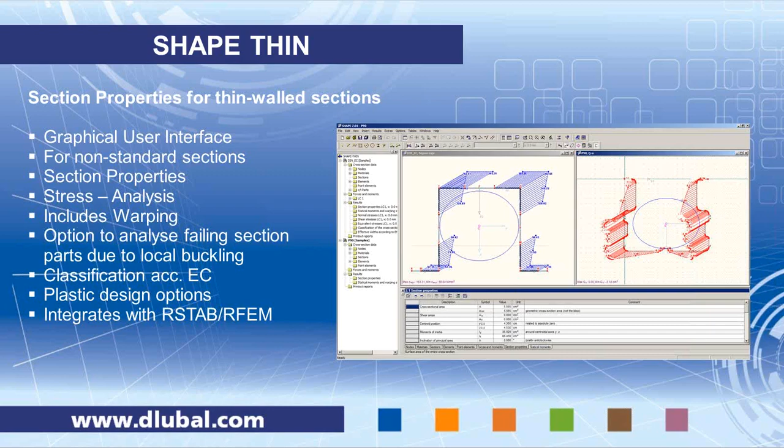It's also capable of importing internal forces from RSTAB, RFEM, or you can manually enter internal forces as you like. We will see this module live, presented by Chelsea in a few minutes.

The second module that we are going to take a look at is RF-FE-Ltb. It is meant to do buckling and lateral torsional buckling analysis according to second order theory.

It's made from a 7-degree-of-freedom 1D finite element, which includes warping moments.

In general, you find in the codes procedures for how to check stability for standard sections, like an I-section, but once it comes to a general section, there aren't many regulations you can use.

In general, you have to use a program like RF-FE-Ltb, where you can also set loads eccentrically.

That includes the 7th degree of freedom, the warping degree of freedom, and with an imperfection and second-order theory analysis and a stress analysis at the end, you can check for the allowable or limiting stress.

And you can check if the critical load factor is smaller or larger than 1. As I said, it works for all kinds of sections. It allows you to place loads eccentrically.

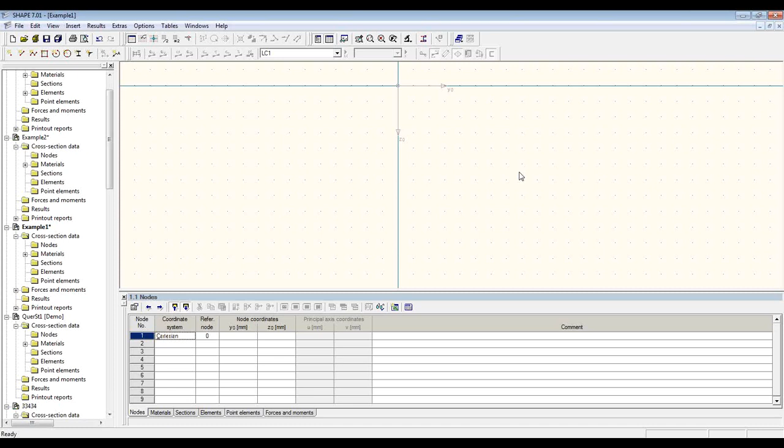Below that are tables. To the left here we have a navigator, and at the top there is a toolbar with several tools for modeling and also for displaying the results. So in Shape-Thin, when you are creating a new file, you have some options here in this dialog box.

First, you define the name of the section, which is also the file name, and you can also add a description, which will appear in the heading of the printout report. Below here, you can see some options for calculation.

Here you can define if you would like plastic section properties to be determined. You can also perform plastic design, check limiting ratios according to DIN, and also check or analyze the effective cross-sections. To the right here is just an option where you can define the direction of the global coordinate axis.

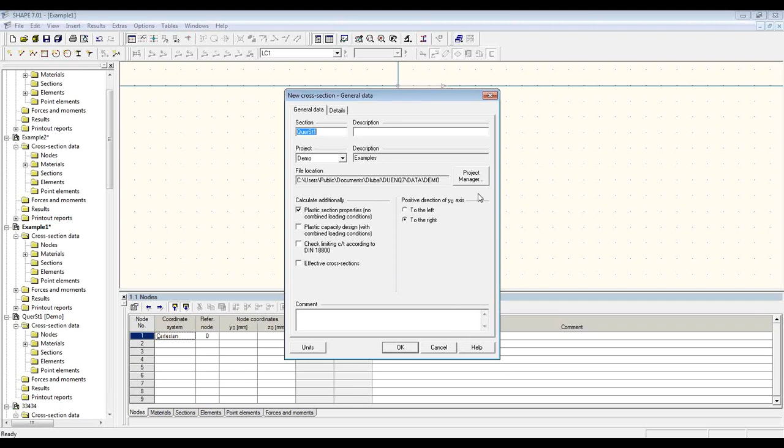Okay, one last thing before I start with my example, I'd like to take a quick look at the project manager. This comes with Shape-Thin and is a nice way for you to be able to quickly access and organize all of your files in previous sections that you've created. Here is a preview of my first example I will be creating, and here's a preview of the second one, so you can keep that in mind.

Okay, so getting started here, my first example will be demonstrating one of the ways in which you can create sections in this program, and I'll be making a built-up column section out of standard I sections and then modifying them. I will be creating an opening and modeling some welds.

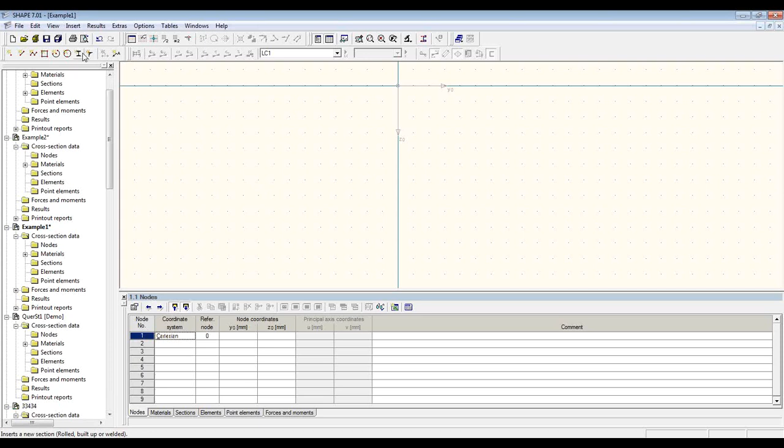So first, I'll go ahead from the toolbar, open up the cross-section library, and here I can choose my I section for my first part of this. So I'm going to take an IPE 500.

And this dialog box that appears is what facilitates you placing the section. So since this is my first one, I can just go ahead and place it so that the top flange is at the center coordinate.

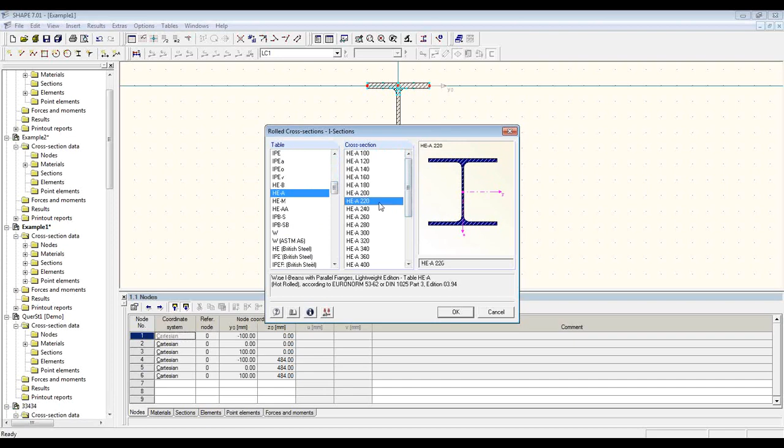Okay, going back into my cross-section library, I can choose an HEA 220. And here I'll use this dialog box a little bit more. I want to define a rotation, as if you saw from the preview, I'll have a rotated I section attached to the web. And here is where I define which part of the section I'm deciding my placement by.

So at the moment I have the center one selected, so if I go to the window and pick this node here, the center will be placed there. So first I want to go in and choose the one on the left side, and then, one moment.

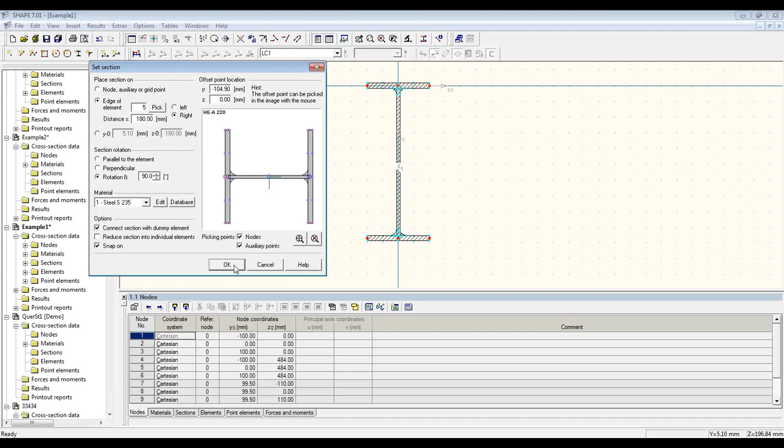Okay. I can go ahead and choose where it's going to be placed on the section that has already been placed. So here I pick the element that I want on the edge on the right side, and so there you can see it's locked on the right side of the web here. And I can just place it anywhere, or I can select my distance from here. Okay, and hit OK, and there I have it placed.

So now I have two standard sections that can be selected independently. If I would like to show the section details, I can go ahead and display them from this dialog box if you need to reference that at any point.

Okay, so as I said, I'd like to make some modifications, add an opening. In order to do that, I need to be able to select these parts individually. So if I make the selection of the entire element, right-click, and select Reduce Section into Elements. So now I'll show you exactly, letting me know I have 5 elements and 4 point elements.

So here I'll go in, zoom in. You can see that each side of the flanges and the web each make their own element now independently, and the curved parts are point elements as well.

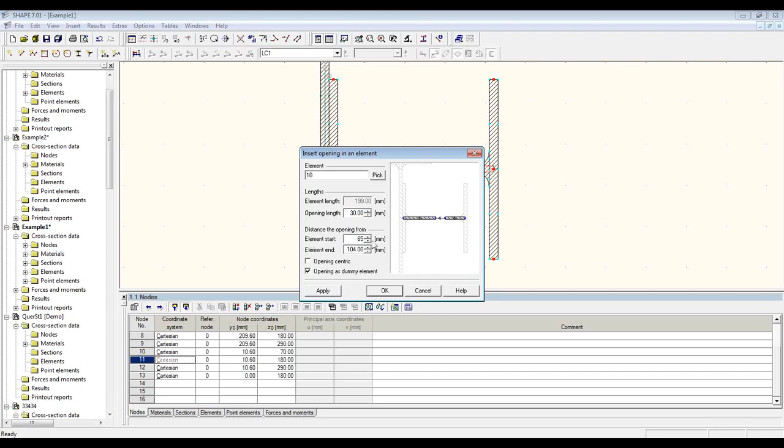So now I can select the web, right-click, and choose to insert an opening. So here, define my width of the opening. I want 30 millimeters, and its location. I want it to be 65 millimeters from the start of the element, which in this case is the right side. So apply, and I have an opening placed.

When an opening is defined, what is put in between is a rigid dummy element. And for our calculation, we have a value called the effective thickness, which is for the shear transfer. The recommended assumed thickness is the average of the thicknesses of the neighboring elements. So in this case, the web here is 7 millimeters, so I'll make the effective thickness 7 millimeters.

Okay, so next I want to model a couple welds at this connection point at the top and bottom. So for that, I'll go back up to the toolbar and select a new point element. And this is ready to go.

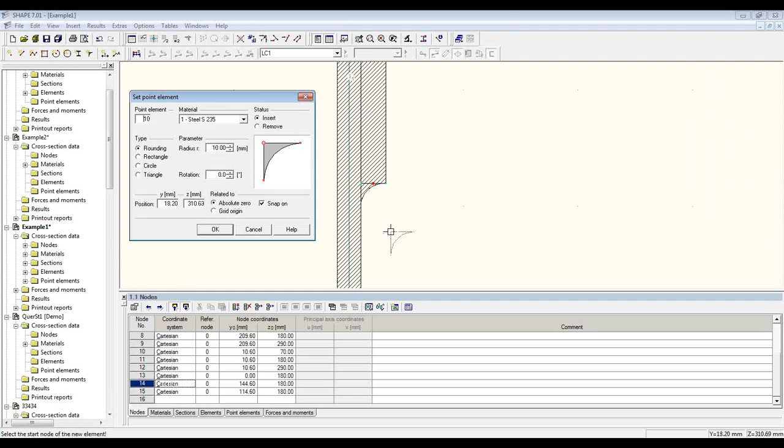I have my radius at 10 millimeters, and then I can select which node I want to place it at, and there I have my weld. If I go up to the top, I can make a rotation of negative 90 degrees and place the top weld there. So now the area of this weld element will be included in the total cross-sectional area.

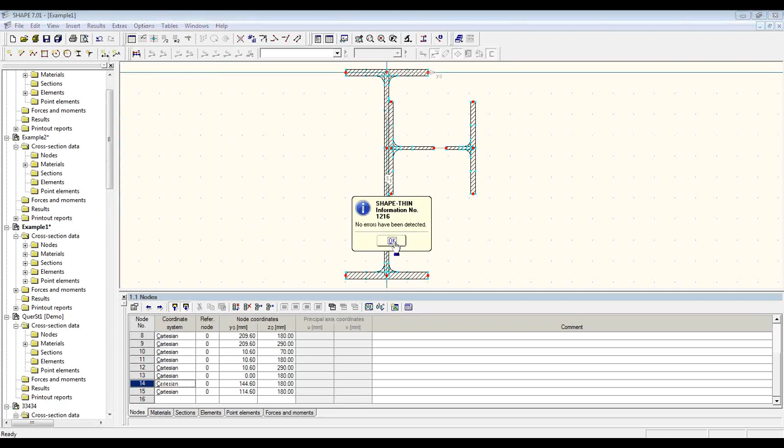Okay, so at this point I have all of my section modeled. What I can do before my calculation is a quick plausibility check. This check will find if there are any errors, and if there are, it will tell you exactly what the problem is so you know what to fix. So, plausibility check, no errors were detected. Now we're ready to run our calculation and get our results.

So the first table you see here is the section properties. Here's a list of all the significant section properties that have been determined. You have your shear areas, cross-sectional area, position of the centroid, and so on. You can define what is included in this list by using a filter here, and you can include even more properties as well.

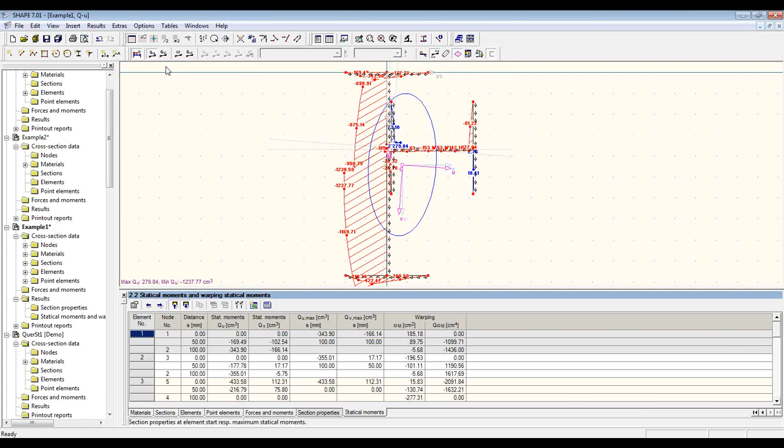Next, the table available is the statical moments. This is the numerical results, and these results are also included in your graphical layout. So I'm going to turn this back on, and you can see the statical moments in both directions, your normalized warping ordinates, and also your statical warping moment.

One thing I'd also like to point out in the tables here, before you get to your results, is a table for internal forces and moments, in case you want to perform a stress analysis. These values can be imported directly from RSTAB or RFEM, or they can be manually placed.

I'll go ahead and add a couple load cases just so you can see, at an x location of 0 - you can do it at multiple x locations. I'll add a compression force of 80 kilonewtons, and then bending moments in both directions for the first load case. Then for my second load case, I will add a smaller axial force, and bending in the opposite direction for my last bending moment.

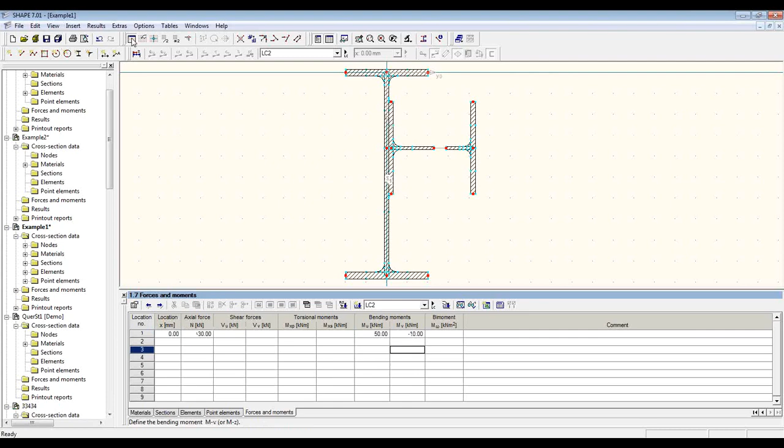Okay, so now when I run my calculation, a few more tables appear here at the bottom, and you see the values both in tabular form and graphical distributions. So I have my normal stresses, my shear stresses - there are none here since I didn't have any shear forces - and also your equivalent stresses.

So going back to my graphic here, I can include these images of the results in my printout report if I'd like. I'll go ahead and send a picture of the equivalent stresses to the printout report, and set it at 50% of the page. Then I'll also send the normal stresses, also at 50% of the page, and open it with OK.

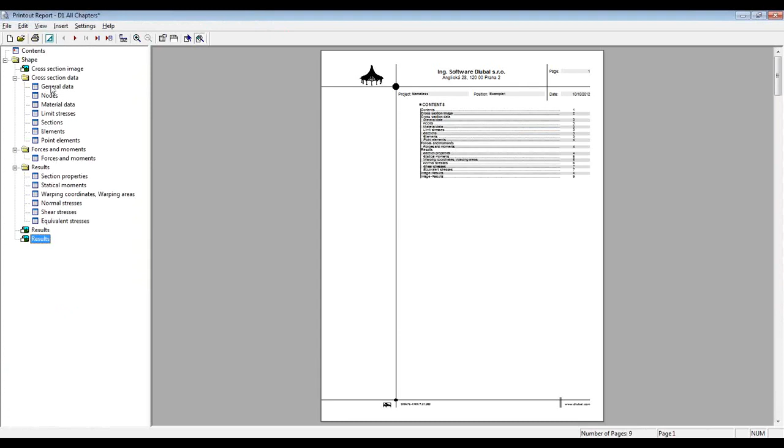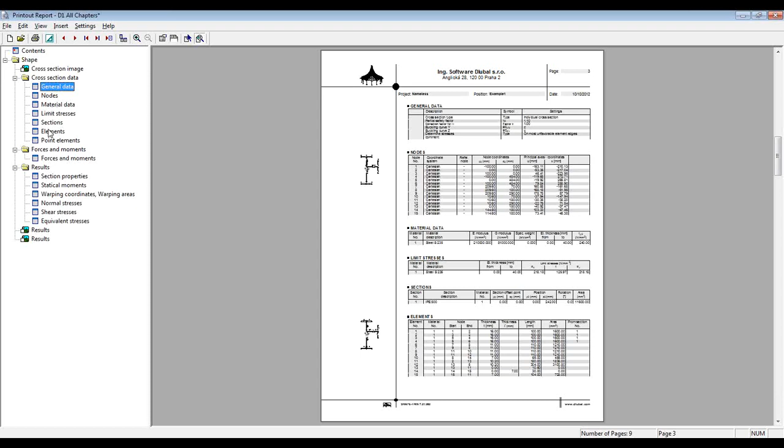And here we have our printout report, which comes with the default setting. It has an image first, and then your tables of input data and also your results, in the same order as they appear in the program. Below you can see the images that were included. You can customize exactly what information you want to include in this dialog box, and reduce the amount of information that's included.

Another nice feature of SHAPE-THIN is that for a quick summary of the section, input data, and section properties, there's an option to create a so-called short form printout. This is usually one page and sent directly to the printer, but just to let you see what it is, I'll go ahead and append it to my document.

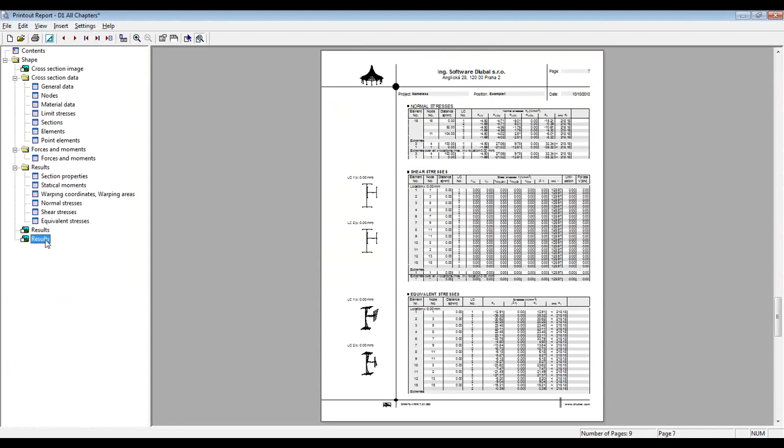So this is the page here - just a one-page sheet with an image of whatever you have displayed at the time you send the print, and a table with your input data and then your section properties that have been calculated. So that's nice to have.

Okay, so that's all for my first example. I'll go ahead and get started on my second example. If you remember from the quick preview I showed at the beginning, it's a symmetric section that will be used in a rain gutter system.

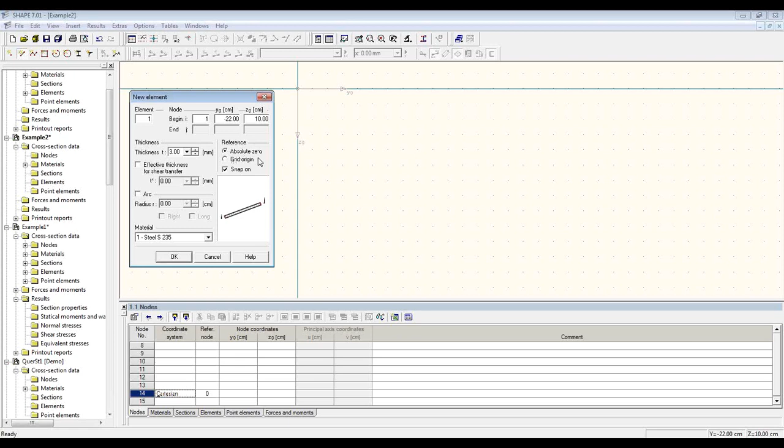And so for this, I will just draw it in manually using the element tools in the toolbar. To get started, here you define your grid, or your reference point in the grid. I'm working with a 2 centimeter grid spacing. Also define your thickness and material, and then you can just draw it into the grid.

My second line here I want to be 5 centimeters, but because it's in between my grid spacing, it's easier for me to just type in 5 centimeters as the end node. So it appears, and I want to continue on from this node, but again it's between the grid spacing, so what will help me is if I adjust my grid origin to be at this node. Now I can continue directly from here.

I want the height to be 16 centimeters, and then the width of the trough I want to be 30. Because I have my reference, you can see in the dialog box my reference is at absolute 0. If I change it to the grid origin, so now this is the 0 line for Y, I can go ahead and place it at 30.

Since it's symmetric, I can just do manually half and then make a copy of the rest over. First I'd like to shorten this line from 4 centimeters to 3. A quick way to do that is to go into the table, find that line, and adjust the coordinate that way. Now it's shortened, and I'm ready to select and make a copy.

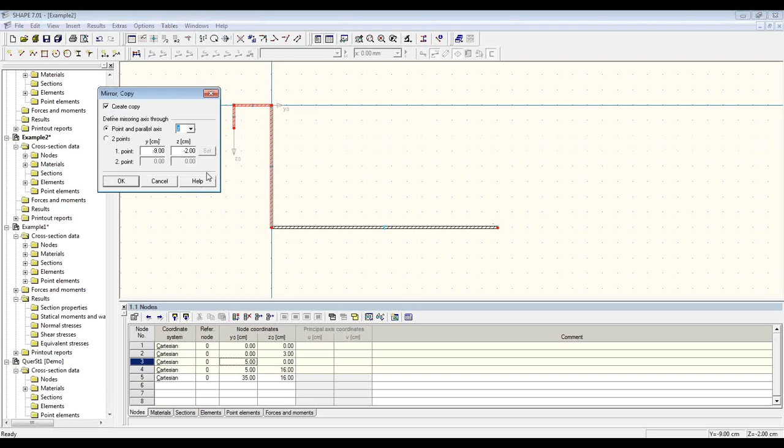Going to the toolbar, I have the mirror option. Create a copy through the Z axis, and select the center of this trough line that I have here. So just like that, I have my full section.

And I can go ahead and run the calculation. First I'll just do a plausibility check to make sure I have all of my elements connecting. Everything is okay, and I can get my results.

Again, you see right away a table with the section properties, and your statical moments and warping constants there. Another thing that is nice to include in your documentation is dimensions, an image of the dimensioned section. I'll show you how you can do that quickly.

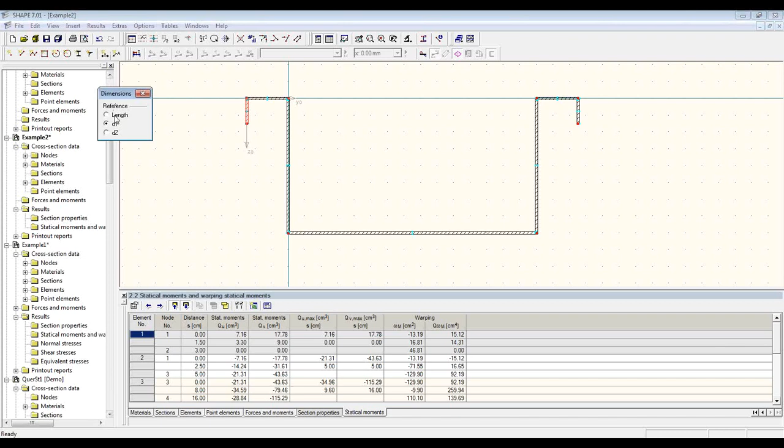I can turn off the view of my results and use the dimensioning tool here. Very quickly I can just select to show the heights of these lines and also do the horizontal lines. This is also a nice way to quickly make sure you've made all your lines the right length.

And here you can see, if you check the table, I believe I made... everything is okay, so I think I just made a bad selection with my— I can't select this, but here we go. I just made a bad selection for the dimensions, so let me just try that again.

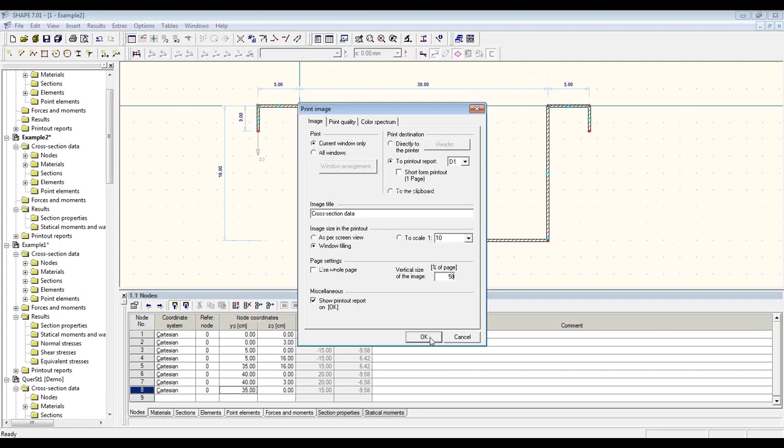Yes, everything is okay. As I said, this can be included in your documentation, so I can just send this once again to the report. 50% is a good size for this type of image. And then there I have a dimensioned drawing of my section to include in the documentation.

Okay, so this is all that I had to show you regarding a couple different ways in which you can model in Shape-Thin. It's also possible to import a Dxf file to use as a template, so this is what Walter will cover, so I will save that for him.

Walter will also take you through a few more hints with working in Shape-Thin and continue with the section on into RFEM and also present the module FE-LTB. So thank you very much for your attention, and I'll go ahead and let Walter continue from here.

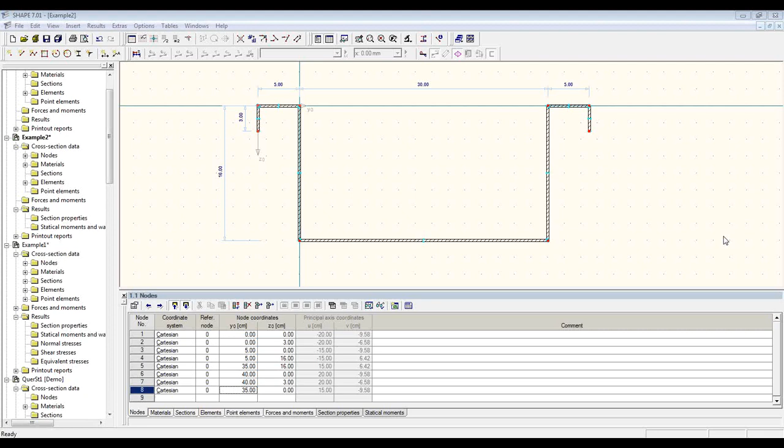What I'm going to do next is I'm going to import into a new Shape-Thin model a Dxf template. Therefore, I open a new cross-section. I name it with a number in this case, and I stick with the default template. And I have here an empty file.

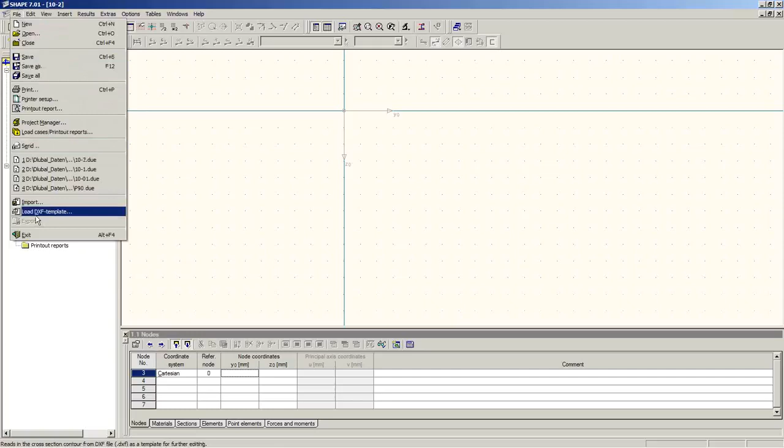The Dxf template can be from any Dxf file. You find those files typically from the makers of such sections on the internet. You can download CAD templates, and I used one of those from a cold-formed purlin maker and saved it as a Dxf file.

Once I import it, I get a small preview dialog. I can first of all show and hide the different layers.

In those DXF files, typically there are all kinds of lines, texts, and explanations, and you have the option to select a certain layer where the information you like is located. I can also automatically assign a thickness to this layer or to those elements.

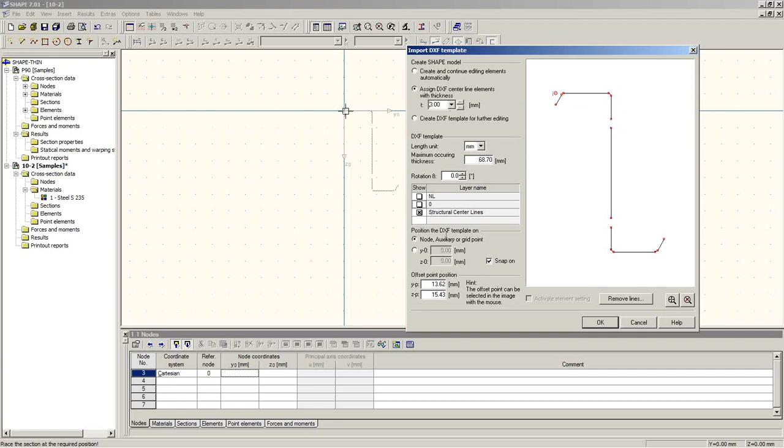I enter the thickness here in the text box, 3 millimeters. After that, I can grab the template at the center point origin and then drag and drop it into the main Shape-Thin window. At a mouse click, I have my complete structure already generated.

What I see here also are so-called arc elements. If I double click on one, I see the radius of those elements, the thickness, and so on. It's just like a straight element, as Chelsea showed us, but there are also arc elements possible.

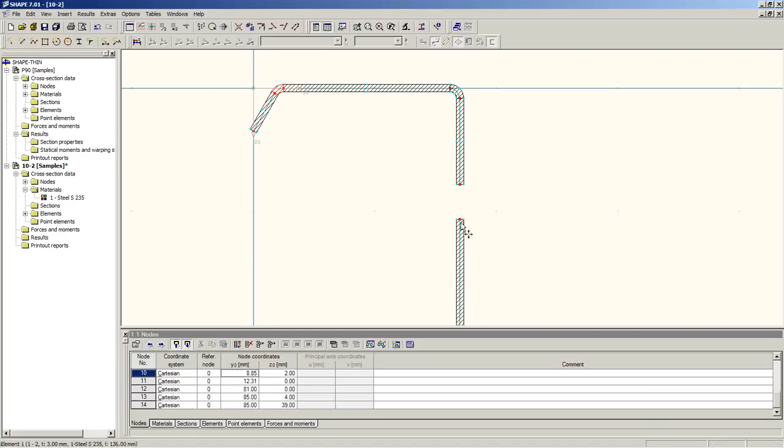Here in this model I had there was an opening for bolts. Because I'm going to use this cross-section to model a three-dimensional 1D beam, I don't want to have this opening along my beam, so I close it here, because bolt holes are typically only a local problem.

So I can just click and drag the nodes to the next connecting node and it will automatically connect. My cross-section is then ready for analysis. I run the analysis and get the tabular information of the results, as Chelsea showed.

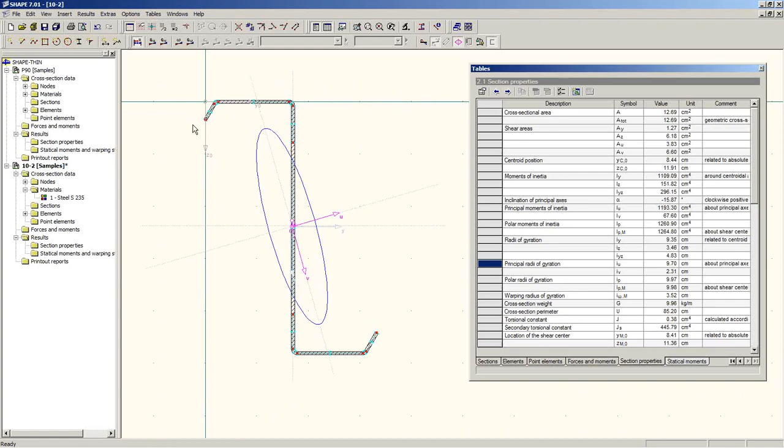Interesting for me are the section properties, and I can display them, for example, on the side of the window, and I can go through the graphical results by showing the different results here.

I notice here there is a little problem where I can close the tables - I don't like to see them here - where the flow of the diagram is not continuous. The sign of the result may depend on the orientation of the individual elements.

If that's the case, I can click on the element, right click, and use the command reverse direction. I do the same thing here because we had the same problem - reverse direction. If I analyze the structure again, now I see there's a continuous flow of the results and it forms a nice picture.

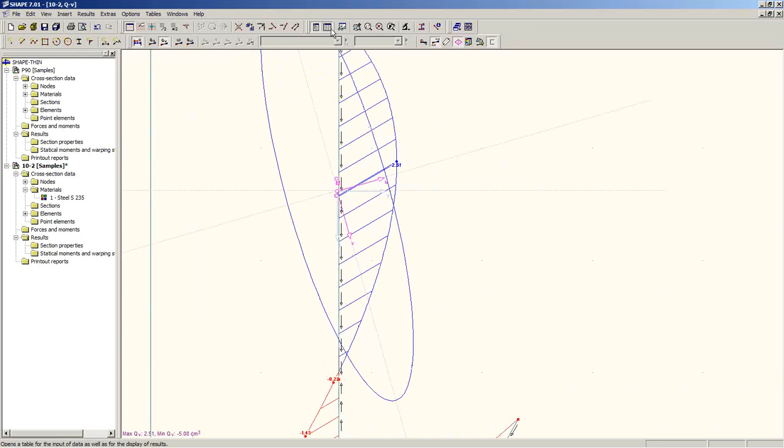With this I also get, for example, the rotation of the principal axis. If I want to know how big that angle is, I can show the table, and there should be the inclination of the principal axis: minus 15.87 degrees.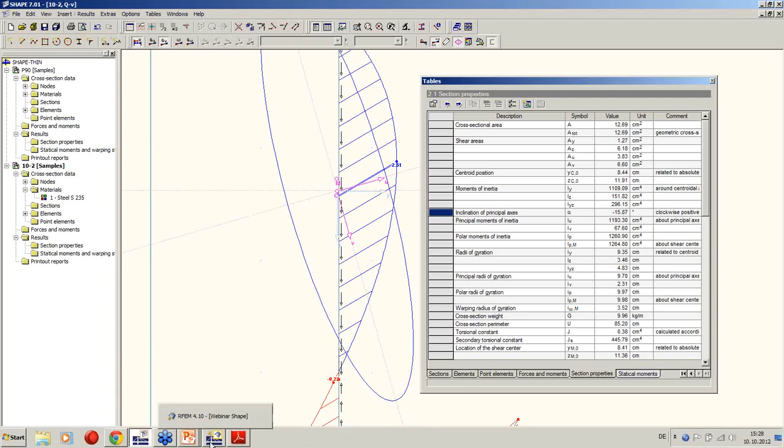I save the result in file 10-2 and go to RFEM. In RFEM I will also create a new structure. What you see here is the final result of what I'm going to do now.

It will be a 5-meter long beam with a linear load on top, and we will do an analysis of the critical load and show some tools you have inside RF-FE-LTB. We start a new structure inside RFEM, and I can call it sample 2 maybe. It's a 3D structure.

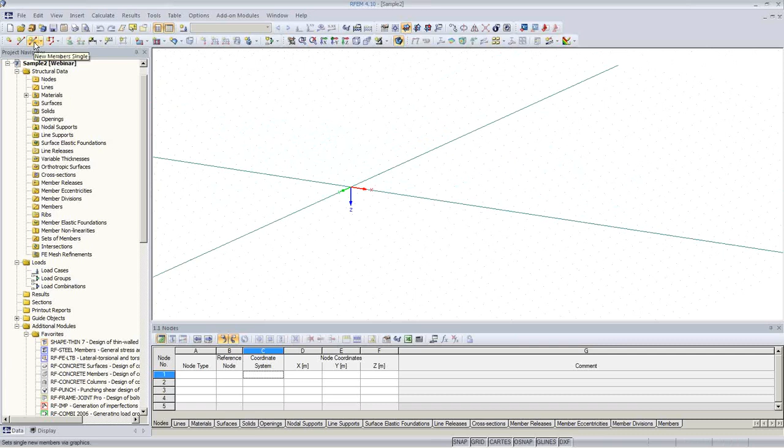I can model it just as a regular structure that you might have seen in the previous webinars. I create a new member of type beam, and I create a new cross-section and choose it from the library.

In the library, if I go back one time and choose the library here, I see there are two buttons: cross-section programs, Shape-Thin, and another one we have, Shape-Massive, which is for thick-walled cross-sections. I use Shape-Thin here, and then I have the option to select my cross-section that I just made.

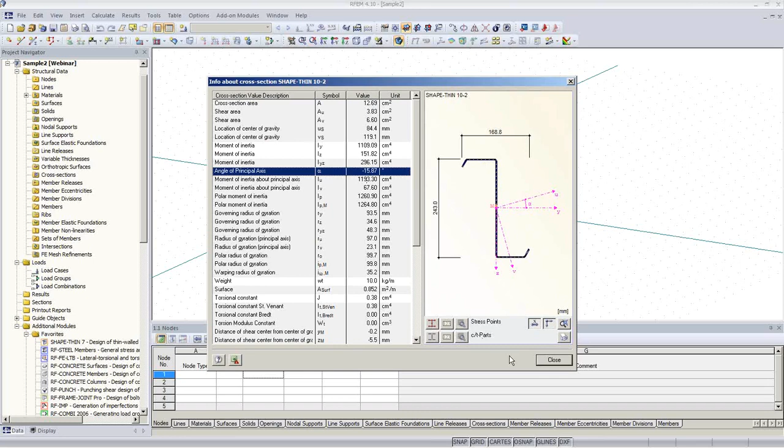It's 10-2. I can check also the sectional properties, and all the parts are here. It's like a regular integrated RFEM section. Also the angle is there, so most likely I picked the right one. Okay, material is steel.

A couple more OKs, and then I can enter and select the grid lines and enter the member. It's now 5 meters. You see here a nice feature: the rendering is just like a standard library section, and it gives a very good visual impression.

If I don't want to see it because it's hiding too many other parts of the structure, I can turn the rendered mode on and off.

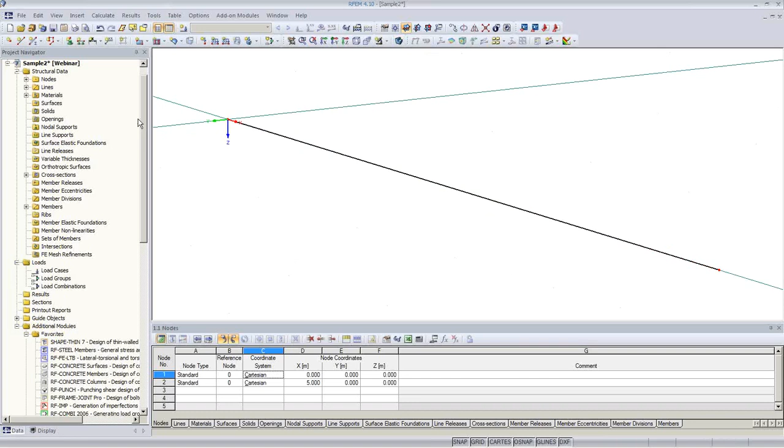I need some supports. I create a new nodal support and choose a support that is fixed in all 3 directions, and the restraint about the local longitudinal axis phi x. So, OK, I can enter the first node support.

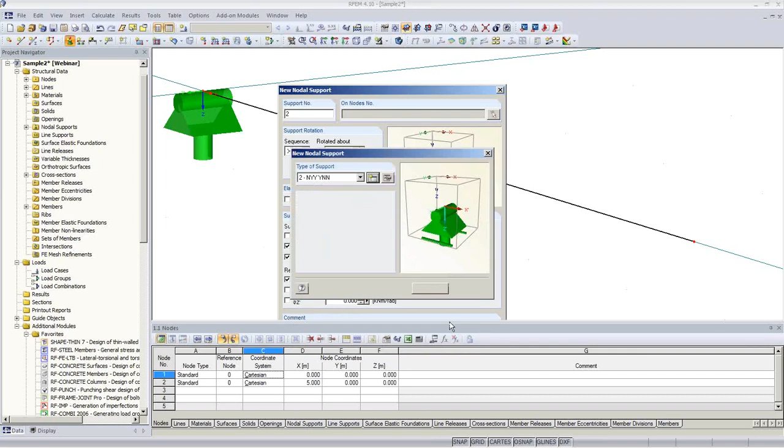I create another one and make it a fork type support again, but this time I release the fixation in the UX direction, and again the restraint about phi x. Okay.

So this will give me a correct support condition where I can analyze the structure.

Next, I will create a load case. I call it full load. I disable self-weight because I will add the self-weight as an external load. And I create a linear load, a new member load, global in relation to the true member length, and for now I choose 2 kilonewton per meter.

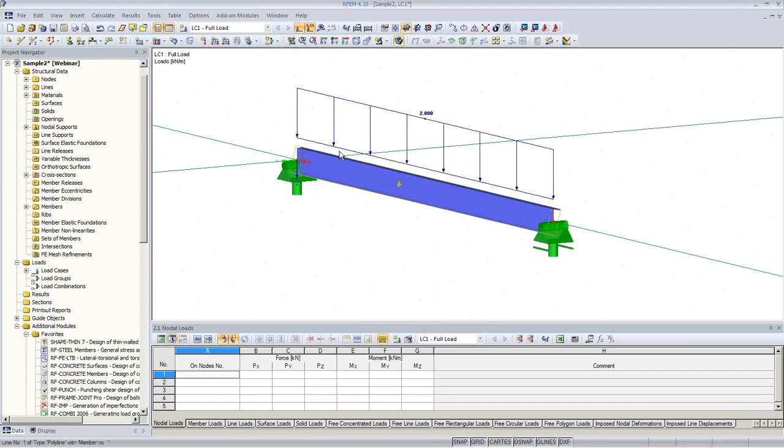With this I have a simple analytical system and I can run the analysis and I get my results. I get deformation because we have a non-symmetric cross-section. Deformation is not straight into direction Z.

We also have bending moments in 2 directions. So if I show this, we have MU and MV. Maybe I have to point out that we have now the option to use in RFEM either the principal axis for results or the member axis for results.

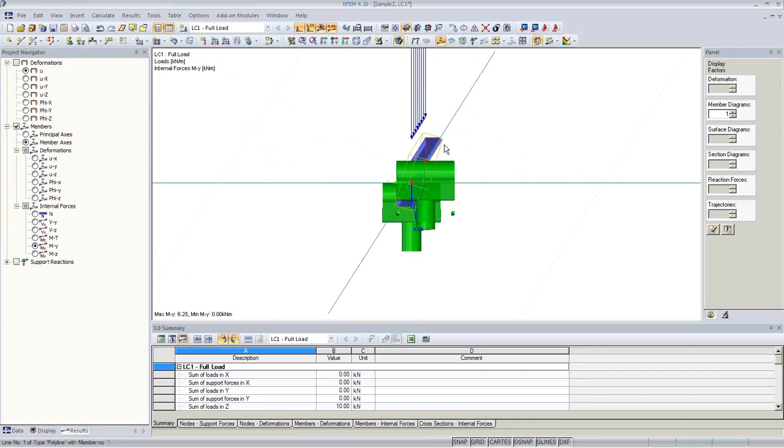So when we imported the Shape-Thin cross-section, it was automatically rotated so that the flanges were parallel to the main coordinate system. The main coordinate system is the global XY system, and the local XY system are in line by default. So I have to rotate it by the principal axis. But if I want to see the internal forces, I can switch them into both coordinate systems using those options here.

Next, I'm going to do a regular stress analysis with the steel member module for this beam, and I just want to run this load case, and I have a utilization ratio of about 60%.

There is basically only plane loading for this member. Also the governing internal forces are only, well, for the global axis it would be only MY and not MZ, but for the local, for the principal axis, of course, it has 2 bending moments.

Okay, we have a utilization ratio of about 60%. Let's just remember this. Next, I'm going to Shape-Thin.

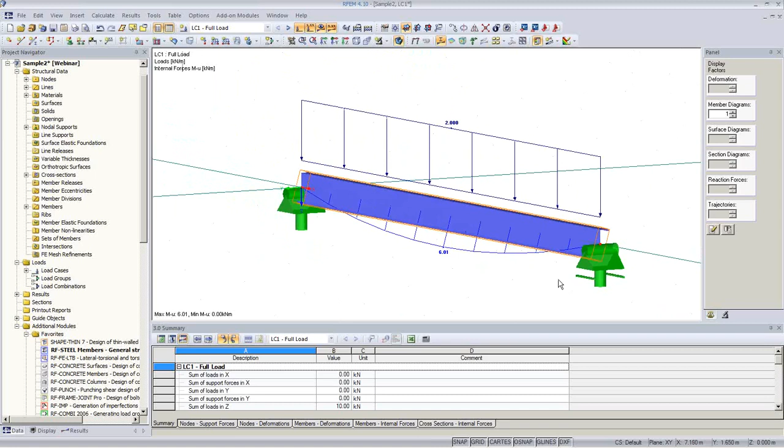Typically, if I have a larger structure with many beams, many columns, many members, and I only like to do a design for a part of the structure, let's say for one continuous beam, or maybe a frame, or a column, it's not possible to do a three-dimensional analysis with a three-dimensional structure in RF-FE-LTB. So we have the topic that we have to isolate part of the structure from a global RFEM model.

The way we do this is I create a so-called set of members, and with a set of members I can group one or several members into one so-called set and give it a name. So basically I can combine, typically the situation is linearly connected members, several linearly connected members into one set of members.

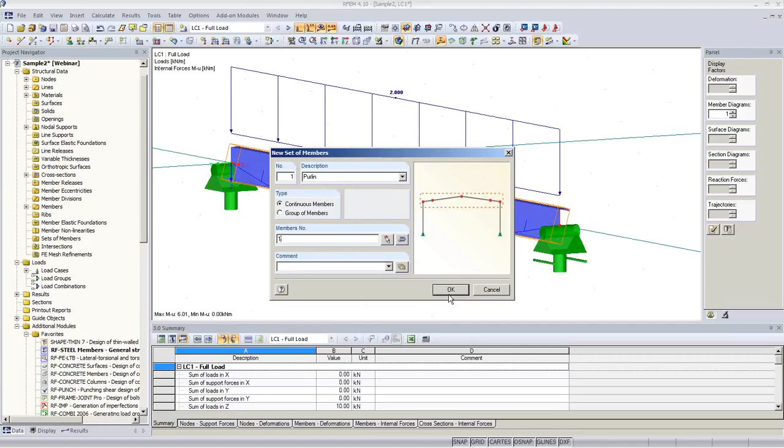Here I have only one member, so it's not so breathtaking, but I need this in order to work with RF-FE-LTB. In RF-FE-LTB, I'm going to open it now. I can select then those sets of members. Since I have only one, I can select all.

It also automatically takes over the loads. So there's one load case, full load. It takes over the materials, the cross sections. I have all the information also here in this module.

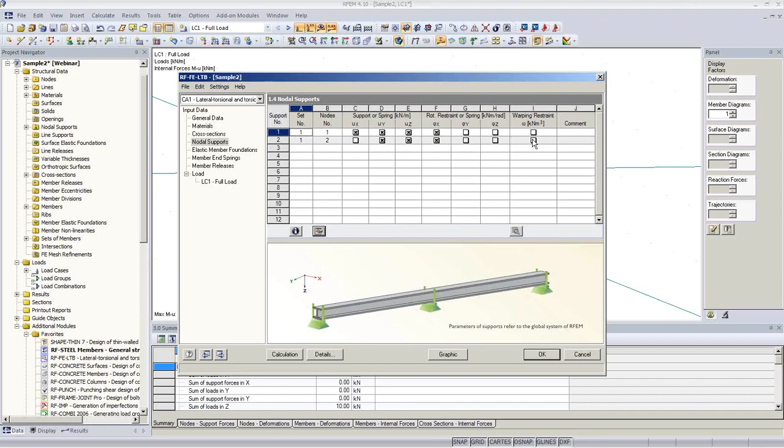And the nodal supports, as long as they are defined in the RFEM model. Now I can adjust them and add them or complete them, because in RFEM or in RF-FE-LTB we also have the degree of freedom of warping, so there is also a warping restraint that I can address. The same thing is also with the elastic member foundation.

Here I have the option to add elastic restraints, and the special thing is I can give it an eccentricity. That means I can have a restraint on the top flange, on the bottom flange, or at one location along the beam. In RFEM itself, I only can have a restraint on a node, or if it's a linear support, on a line, but I cannot place it eccentrically.

Same thing is with member end springs. On each member end, I can attach eccentric springs. For example, if I have only a discrete support somewhere along a continuous beam, I could do this.

I also can have releases in such structures, and again I have the warping degree of freedom here. The loads are also imported from RFEM.

There are different load types that we can use, different load distributions, and if you click here you have the option to pick from the offers here, load direction, and we have the 2 kilonewton per meter imported. Again, we have the option to have an eccentricity, and this is very important if you deal with stability problems.

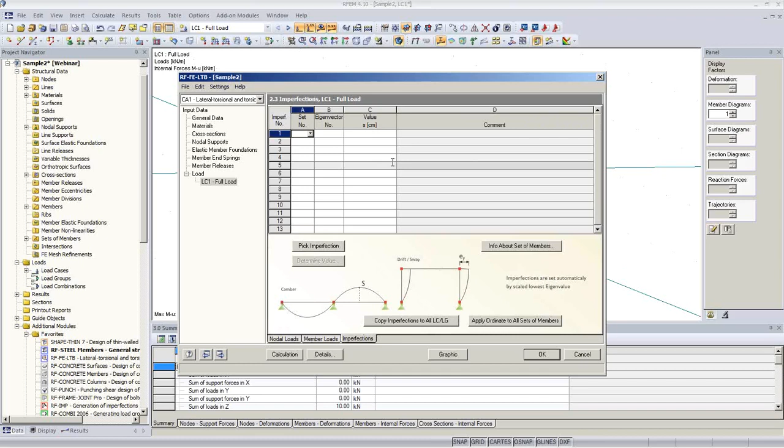Okay, I also have nodal loads and I have imperfections I can work with. I'd like to use the default settings and run the analysis.

What we get here is, again, just as in steel, a stress analysis. We have axial stress, shear stress, and equivalent stress. And now we also have utilization ratio, and you see the difference in the calculation. We have here almost a utilization ratio of 1.

And also as a result, we get here the critical load factor. We get 1.71 as the critical load factor.

If we want to have a stability check according to theory of second order, we need to have an imperfection, and we need to have a stress check that is with a utilization ratio smaller than 1, and we need to have a critical load factor that is bigger than 1. And then with this we can check for stability.

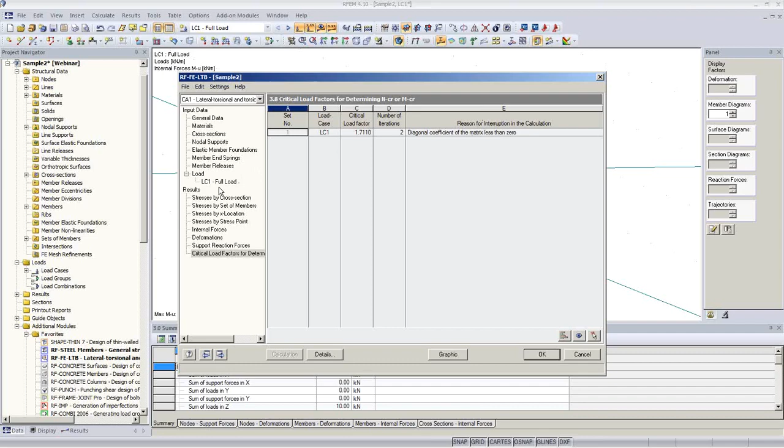Okay, so without any changes from RFEM, I get those results. We can take a look at the graphical results. For example, here we have... we can look at the deformation, for example, and we can show this a little bit better.

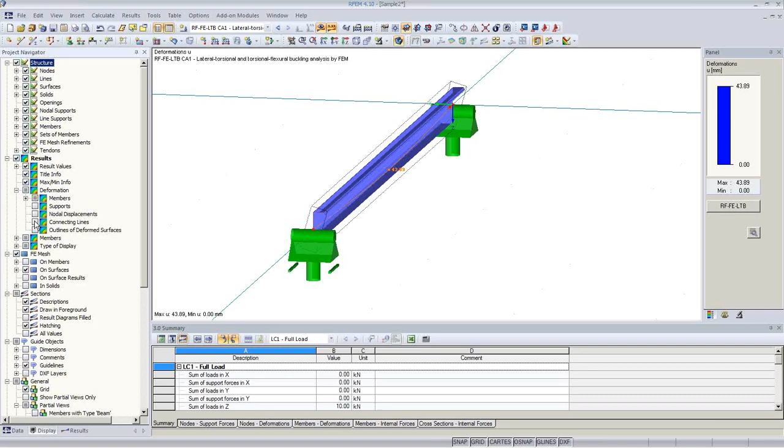If we go to the display tree and check deformations, we can have cross-section colored, and you get this nice display where we can also increase the deformation a little bit, and we see what happens to these cross sections.

So because of the unsymmetry, it's a combination of horizontal and vertical deformation. You can see the top flange is moving sideways and causing all the other internal forces, of course. So we can also take a look at the results.

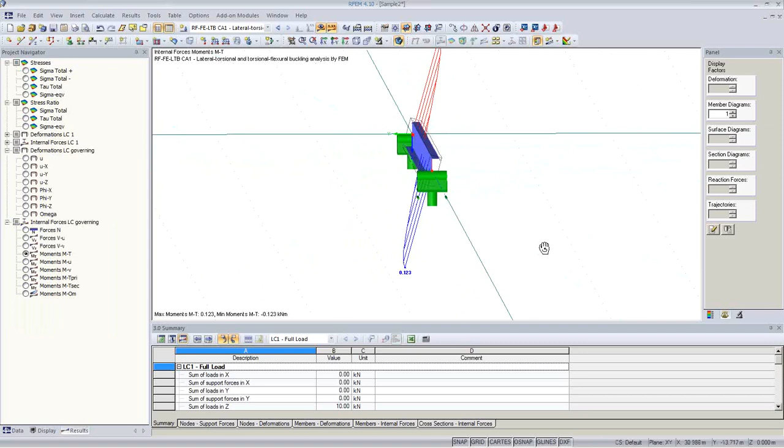So we have some small axial forces, we have the shear forces in both directions, we have also torsion that we don't have in RFEM, because in RFEM the crosswise loads are always in the shear center. And so if we have only global loading, global load direction, there will be no torsion.

But in this module, RF-FE-LTB, all those effects are implemented. Okay, we have primary and secondary torsion, which comes, and also we have a warping moment.

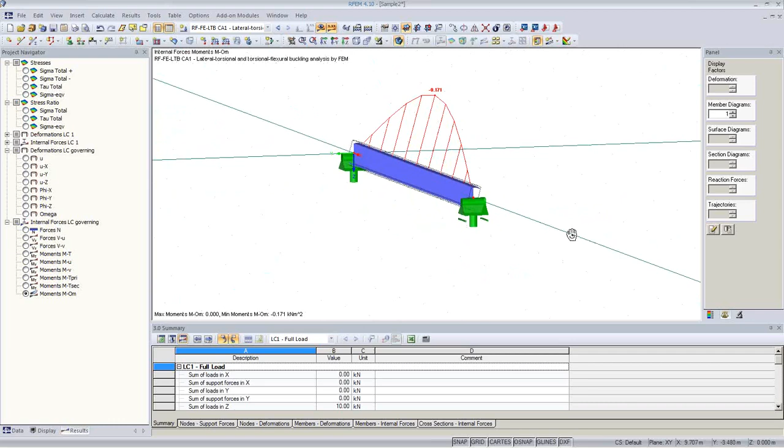Okay, now we want to go back to RF-FE-LTB and continue with our stability check. I'm going to next, put the load eccentrically. So I put it on top because most typically the load is imposed on the top of the cross section via maybe a steel deck and so on. So if I pick the eccentricity, I know now exactly where my load application will take place.

If I run the analysis again, the eccentricity has a very negative effect. You see the stresses increase because the internal forces change, and also the critical load factor drops a little bit.

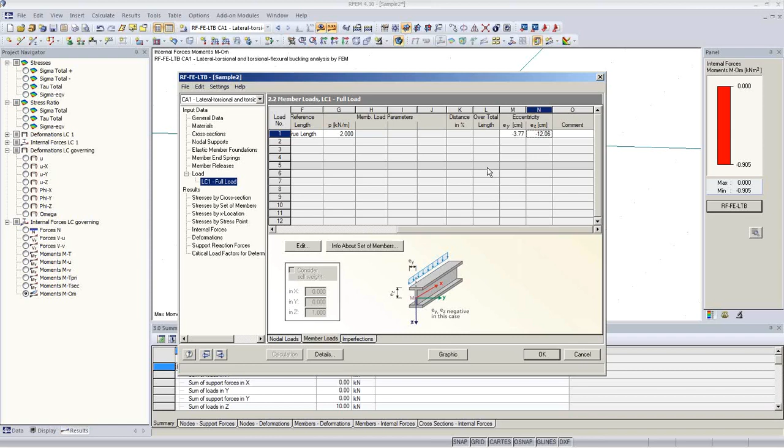Okay, what can I do now? We saw that the deformation was a combined deformation from rotation and horizontal movement. If I'm able to restrain this horizontal movement or this rotation, I will have a very good effect, I think. So this I'm trying to do now.

I'm going to member elastic member foundation. I select my first set of members, and now I can enter all the spring constants for those restraints and also the eccentricity, but typically I don't know those springs. So we implemented a tool that gives you the ability to calculate such springs.

In this tool, you can select what type of restraint you have, whether it is a lateral or rotational restraint. Lateral restraints typically would be trapezoidal sheet. Of course, if you apply such restraints, you also have to make sure that the steel deck, for example, is able to handle those stabilization loads from the restraint.

I'd like to apply a rotational restraint this time from a trapezoidal sheet. I need to give the program the information about what's the span of the support of the trapezoidal sheet and what's the length of the shear panel.

I can either pick it. If I have a building, I can pick 2 nodes. In this case, I don't have, so I just assume here maybe it's 20 meters. The beam spacing should be 1.5 meters.

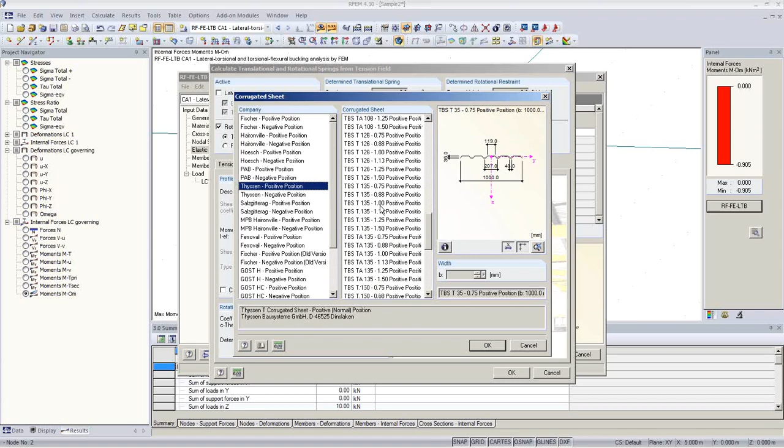The steel deck should be from a corrugated sheet, and I pick - there comes a nice library from some provider - some steel deck, maybe something like this. Okay. All the parameters, effective stiffness of the steel deck are imported.

If it is a continuous beam type of mounting of the corrugated sheet, I can also take this into account. Also, the rotational restraint from a connection can be taken into account, and there's a table from DIN that gives you some parameters depending on how many bolts you use to fix this steel deck. So I say the bolt spacing should be...

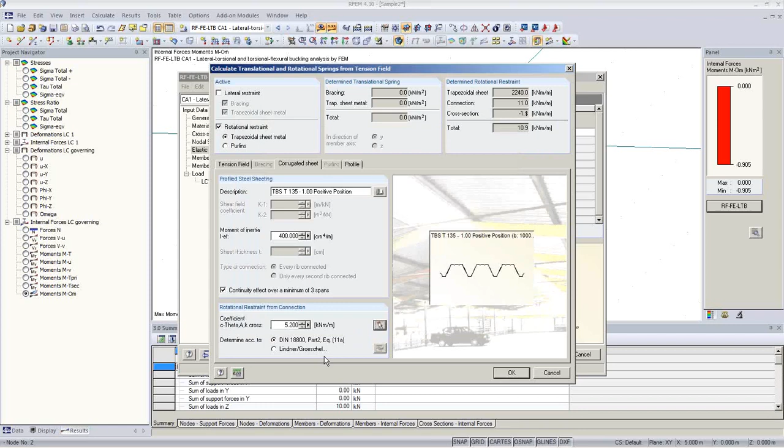Bolts should be in every rib of the corrugated sheet. Okay, and then the last part is the rotational stiffness of the cross section itself. There are also formulas that can be used, but they are only valid for I and channel sections, and this time I just ignore them.

With this information, we analyze the spring constant for a rotational spring, and it's already written in here in this input box. On OK, it will be transferred to the table here. And next, I'm going to select the eccentricity and say okay, this rotational restraint should act on top of the cross-section as well.

Okay, if I do this and run the analysis again, you see we dropped quite a bit in the stress ratio. We're about the same value of 60% that we had from the regular steel module. And also, if you take a look at the critical load factors, we see it's also increased to 6.32.

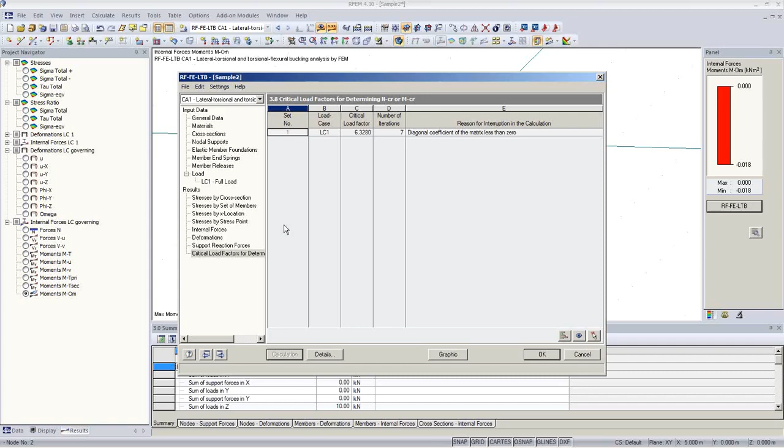To make the analysis of second order, stability analysis according to second order complete, we need to apply an imperfection. This is the last thing I'm going to do. There's an imperfection tab that I can select. And in this case, you might be able to find or to know what the shape will be for an imperfection.

Whether it's cambering or sway or inclination. But if it's a 3D frame structure, you might not know how the imperfection really looks. It has to be according to the first buckling shape. In most codes, it's regulated this way.

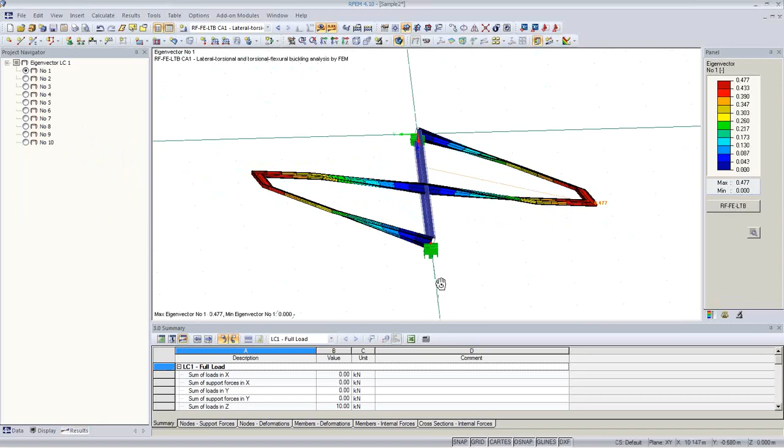RF-FE-LTB has the option to analyze several eigenvectors, and I can pick the imperfection graphically. That means I can analyze several eigenvectors, and I can take a look at them graphically. If it's too much of a distortion, I can change them. I can change the magnification factor, and you can see here the typical failing modes of such a beam.

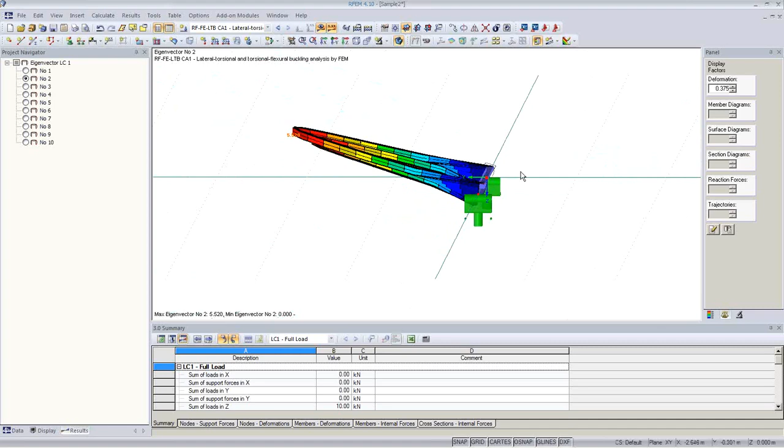I will choose in this case eigenvector number 2, which is the cambering that I want to have, and the horizontal part of this imperfection shape will be applied then to the structure. So I have this graphical view, which is very important to see what type of imperfection I'm selecting.

I go back to RF-FE-LTB, and now I need the scaling value for this imperfection. I need to have the peak value basically of the imperfection. Typically it is length divided by 200. So in this case it would be 2.5 centimeters. There might be different values you find in different codes, but Eurocode, for example, gives you hints in there.

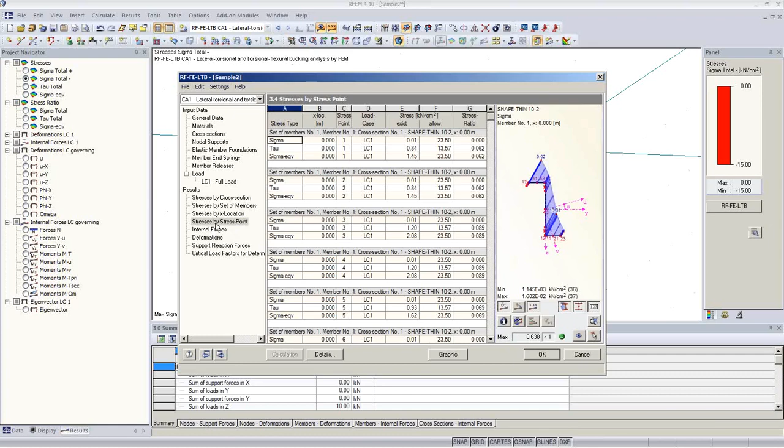With this imperfection, I run the analysis again, and I have again slightly higher stresses, and my critical load factor may be decreased a little bit from 6.28 to 6.22. But after all, my stress check is okay, critical load factor is greater than 1, and all my results are fine. You see here there's different tables: stresses by cross-section, set of member, X location, internal forces.

So you can check all your structures, you get the deformations in numerical way, you get your rotation values here. You also have the support reactions. Also, for example, a good information is the twisting moment at the end from the imperfection, for example, that might be necessary to be taken over by the supporting structure for this purlin.

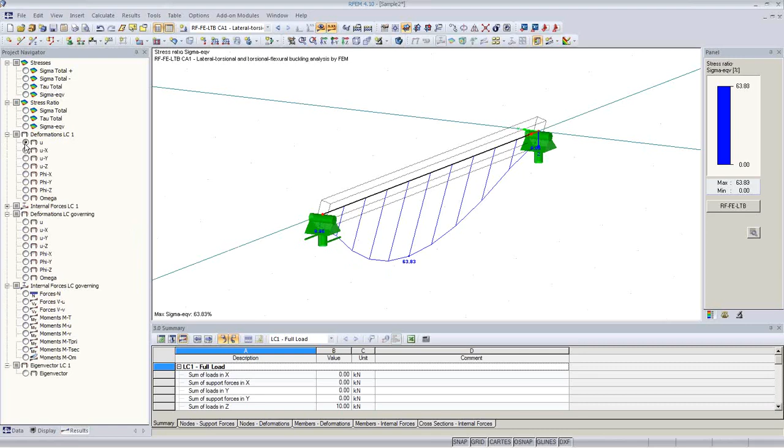We can take a look at it also graphically. We have in our RF-FE-LTB a different navigator for results: sigma total, sigma positive negative value, or the sigma equivalent value, and we can use the stress ratio, so 63%. We can also show the deformations, and you can see this horizontal restraint due to our rotational spring is doing a good job, and it's helping to stabilize this structure.

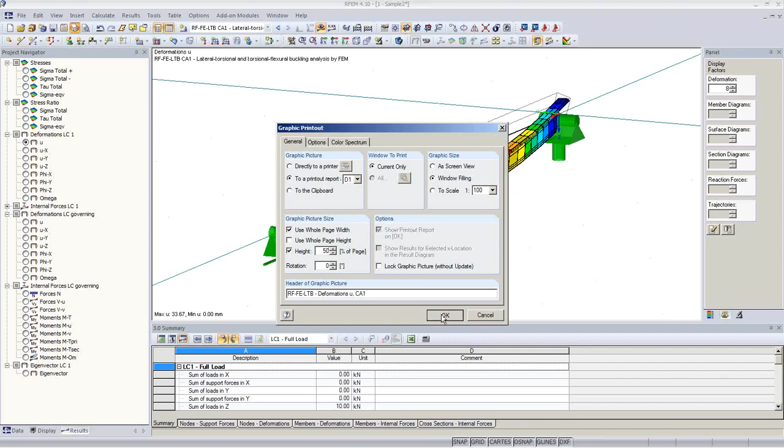Before we go over to some questions, I'd like to do some documentation of RF-FE-LTB. I print this structure, this figure here, to the protocol print. I want to do it window filling. I want to have it on 50% of a page. And when I do it first, I have to open the printout report one time, and it gives me a chance to show you what is in there. So here we have this graphic.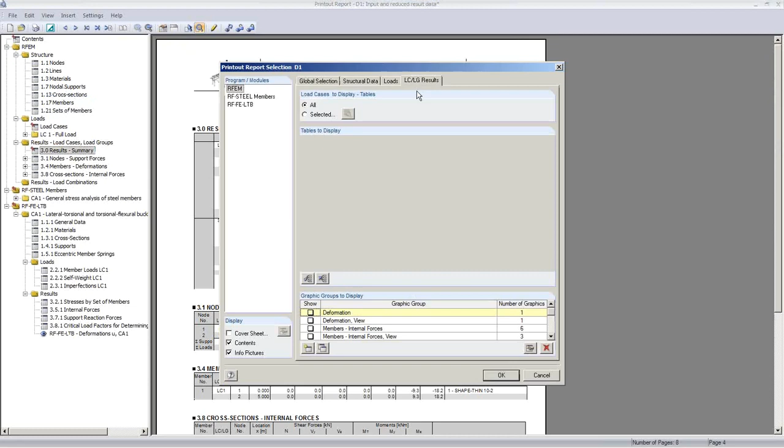RFEM has the regular tables here. You can flip through and zoom in. You have the option to select what you want to have in your printout report.

There is an extra chapter for RF-FE-LTB, and it gives you all the results that we just manually saw in the module itself. So you find all those tables here again, also with the eccentricities and so on.

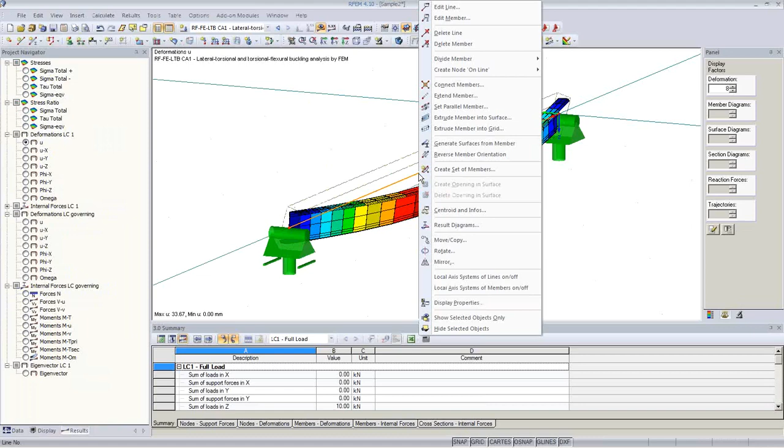There is one more nice thing I'd like to show you. You can right-click on the structure and get a result diagram. In the RF-FE-LTB results, you can check out the equivalent stress, the global deformation, and the internal forces N, the shear forces, torsional moments, local, primary, secondary, bending moments, and so on.

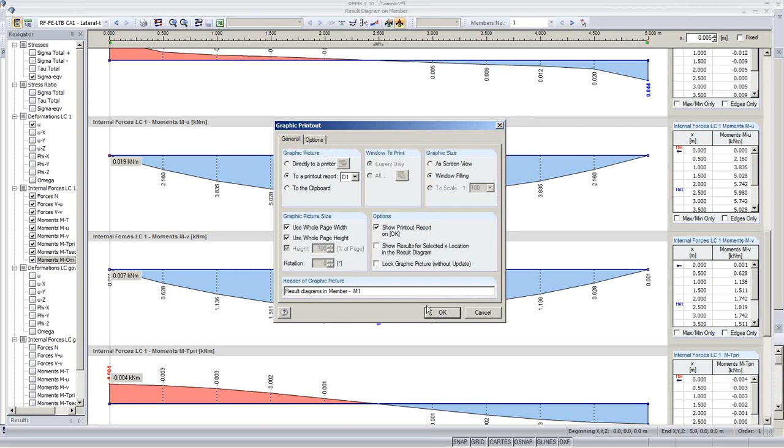Everything is nicely arranged in one line under each other. You can scroll if you like, and print this to the printout report. This is a nice document of all those internal forces, and you can check everything graphically there. Anytime something changes, the printout report will be automatically updated, so it's always current.

Okay, this completes my presentation, and I think it's time now to take a look at some questions. Let me read what is here. It takes me a little bit because I have to first check out what is in there.

There is one question in German, so I have to translate it. The question is: what about the B to T relation of this thin structure? How can we check this? It's a question about Shape-Thin, so I go back to Shape-Thin.

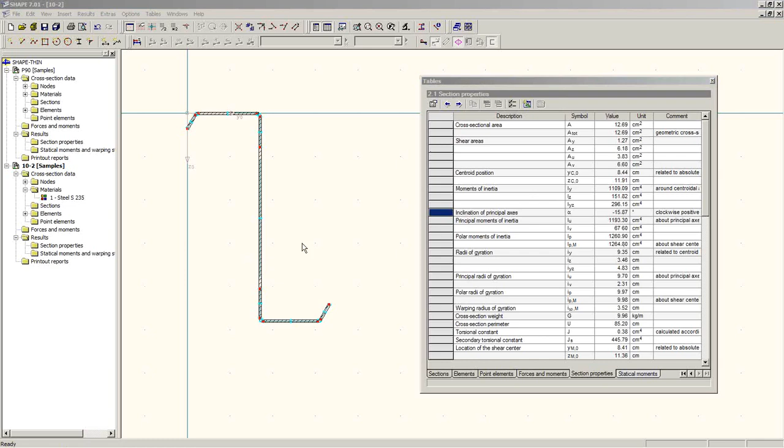You have the option to change or take a look at the width-to-thickness ratios only if you use a certain setting. Go to general data, then check 'limiting C to T values according to DIN'. If you go to the C to T parts, you can also check the rule: elastic, elastic-plastic, plastic. I'll leave it as is for now.

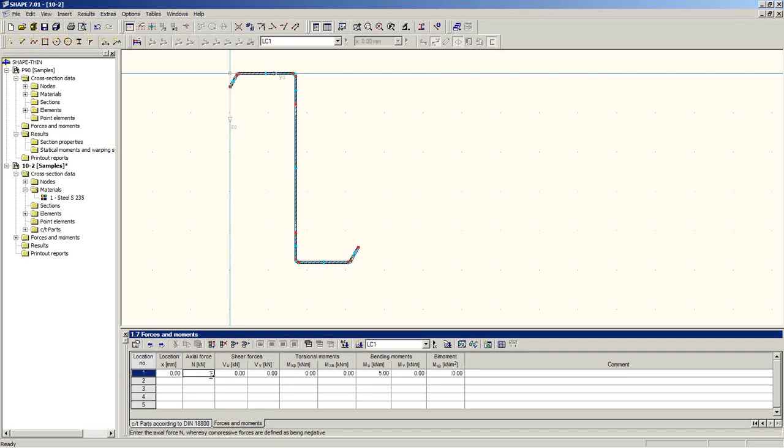I analyze it, run the analysis again, and take a look at my tables. Of course, for this I need internal forces, so I check some internal forces, maybe a bending moment, and maybe an axial load.

If I run the analysis again, I get a C to T value check. You see here, for each element, the restraint type, whether it's supported at both sides, the stresses, and the allowable and limiting C to T value and the utilization ratio.

This is according to DIN, and it's also possible according to Eurocode, but it requires a different setting: plastic effective cross sections. If I check the effective cross sections, I can also use Eurocodes.

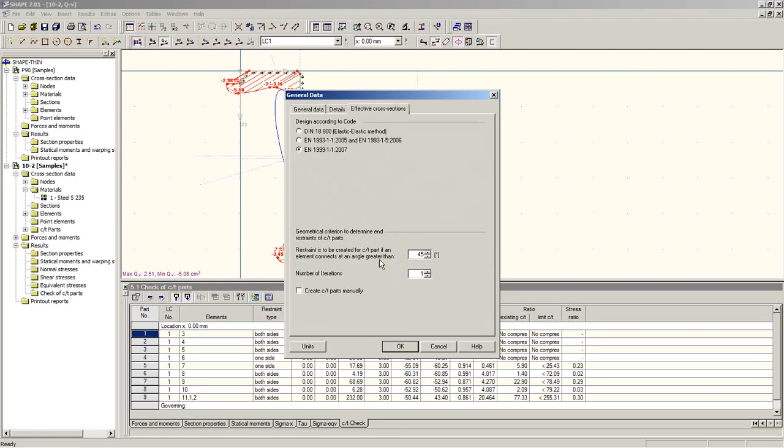I also have here the cross section classification according to Eurocode. It leaves out the curved elements because classification of curved elements is not part of Eurocode, so we don't know how to do it—that's a limitation.

What you see here, the blue lines, are the local buckling parts, and the support condition and so on is all shown again here. Then at the end you get a classification that we can take a look at.

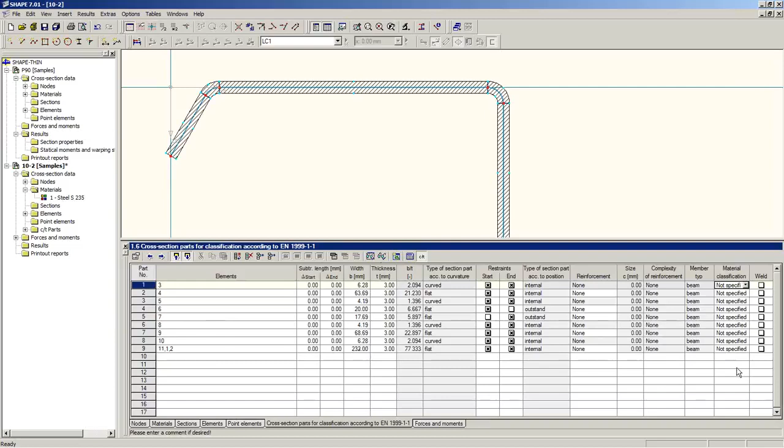The problem here is I didn't choose a Eurocode material, but if we had, I would have gotten a classification for Eurocode too—it's possible to do this classification in Eurocode. I'll send you this picture with the classification, or maybe I can use another file.

There is one typical case here: a hat section, according to Eurocode, using the effective cross-section method, which you can set here. In this case, we can take a look at the C to T values for each element, and we have the classification.

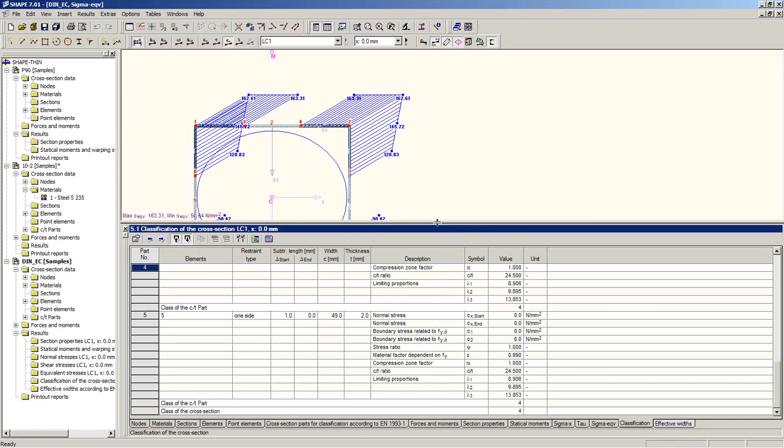In this classification, we get results for all the parts of each element. If I click here, it jumps right away to the right table, giving the c/t ratio, all the internal parts, and the final class. So if it's class 4, the class of the cross-section will also be class 4. If I work with effective width, I get a stress analysis only with the effective width in this type of analysis.

So I hope this question was answered.

Is it possible to make a database of sections? For example, a supplier has 20 types of profiles. Yes, you can do this.

You create them inside SHAPE-THIN, and you take them over to RFEM. In RFEM, if you type them in the table, for example in the cross-section table, the input cross-section table, you will be able to read this cross-section. You have to know how it's named, but it will automatically recognize it.

When I import the cross-section from SHAPE-THIN, it is automatically part of the user-defined cross-section library in RFEM, and each cross-section is also stored inside the RFEM file. So if you send an RFEM file with a SHAPE-THIN cross-section, it will also be there for the user in the other RFEM license.

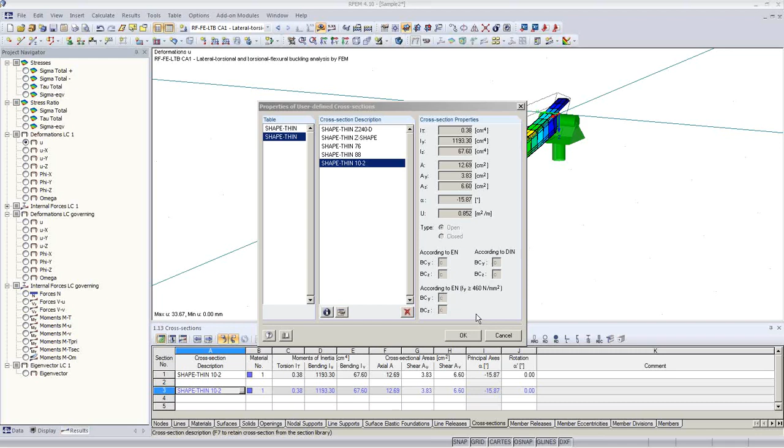Printing to an RTF file: typically, you can export each protocol to RTF. So I can go to File, export to RTF file, or VCmaster, another program that uses RTF files. You can export it to an RTF file and then you have basically a Word format, which is not a Word file, unformatted, and you can use it for any other purpose, change it, and add your own headers and your own graphs as you like.

And of course you can also copy and paste into this file. Let me try it, I haven't tried it for a long time. File, export to RTF, position RTF. Maybe I'll put it on the desktop so I can find it quickly.

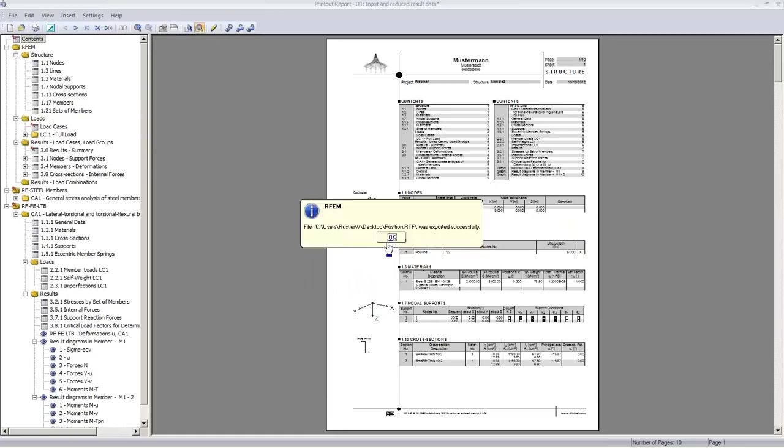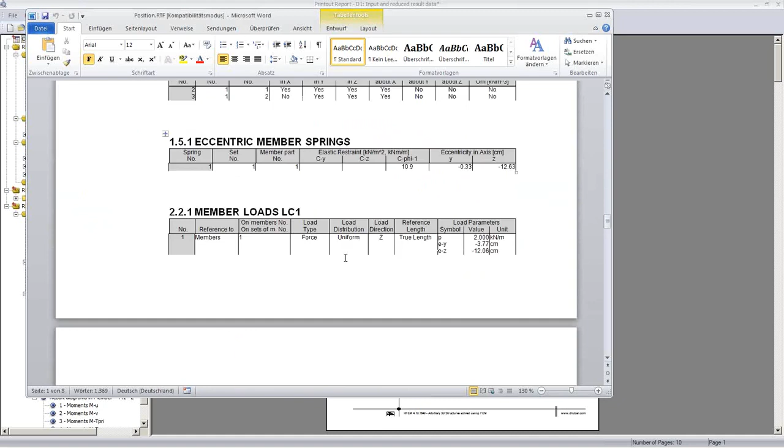Okay, now there's a file, position RTF. I can open it in my Word, and I have here the tables all nicely arranged in my Word document. And then you can enter your own header and your own things, and also there should be some graphics which you can use.

Of course, what you can also do is copy and paste any graphic that you have here. If you want to copy and paste those graphics, you can say Control C, and you can also say Control V, and you will have the graphic here, what you have on your screen, depending on the size of your workspace and so on. So it's all working like in any other Windows application.

Okay, let's see what else of questions we have.

There's another question whether we can have the effective width according to a German code called DAST 016. At this moment, it is not possible. There will be, of course, ongoing development with SHAPE-THIN, and we will improve this.

There is also a new version in work, which has major improvements. We might have seen that there's a little bit of a difference in the user interface between SHAPE-THIN and RFEM. We will have the same user interface with RFEM, and that will also be available, I would say, within the next year.